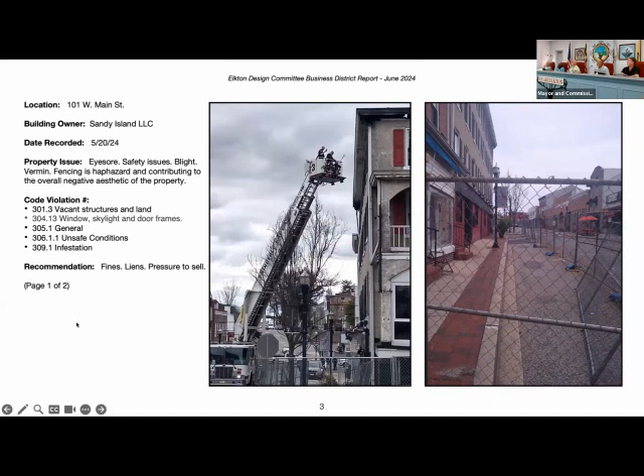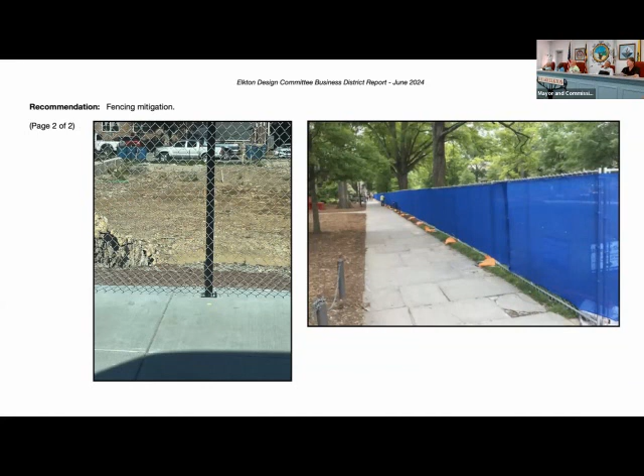On page 2, we have some pictures that, in an effort to mitigate the blight, we're suggesting ways to improve the appearance of the property. These images showcase ways to decrease the negative impact on the town's business district. The first image was taken in Oxford around the area where their devastating fire took place and has been cleaned up. The second image was found on the internet with a cloth over it, which helps give a more pleasing aesthetic to the area.

104 West Main Street - can I interrupt you real quick? Hey Dan, real quickly, could you get some geotech material and wrap around that fence? Sure, thank you.

The town currently pays $2,000 for that fence, we've paid 4,000 some so far. That geotech material is where you can't see in on it, it's actually pretty inexpensive and pretty durable, and we could probably do 2 wraps around the fencing if it's feasible. It's really not a lot of money and it would block that. Doesn't come in the beautiful blue though. That is a really pretty blue.

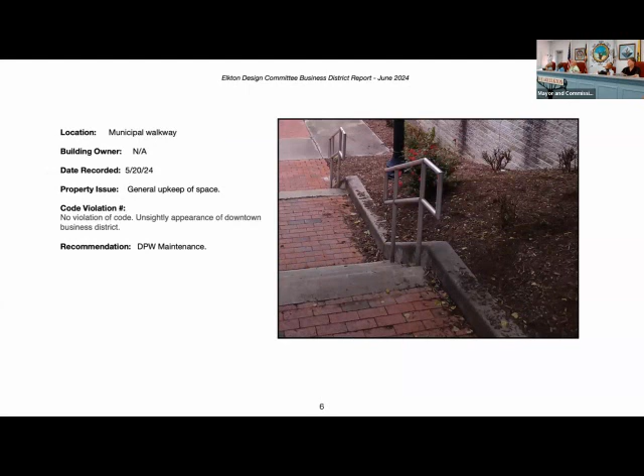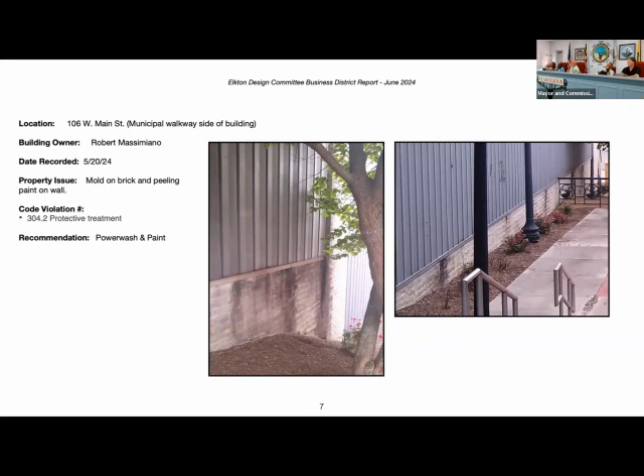106 West Main Street, we've got mold on the walls and the paint is peeling. 112 West Main Street, we've got mold on the brick also, and peeling paint.

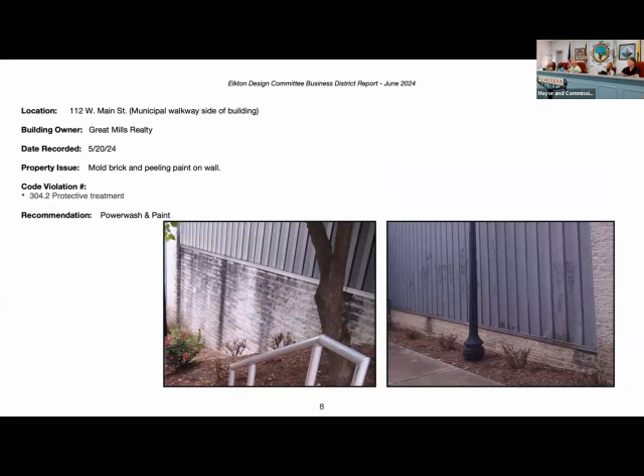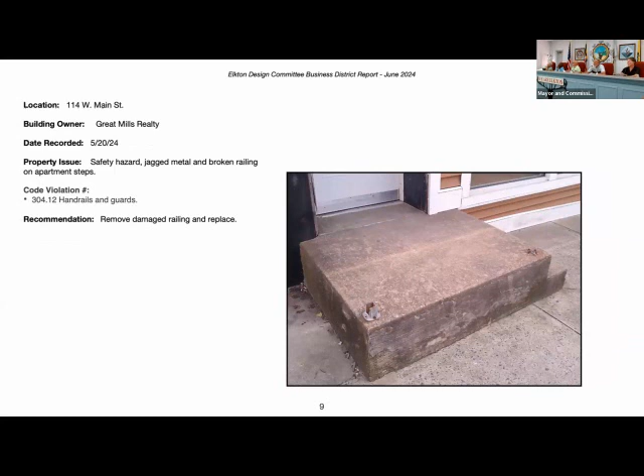There's a safety hazard at 114 West Main with what looks like a railing that got left down, and it's jagged metal sticking out. So that needs to be handled.

120 West Main Street, the empty metal awnings are an eyesore, and there's dead birds in the windows. We were told during Cinco de Mayo that somebody said the birds were slapping against the windows as they were walking up the street, and that was very upsetting to that visitor to our town.

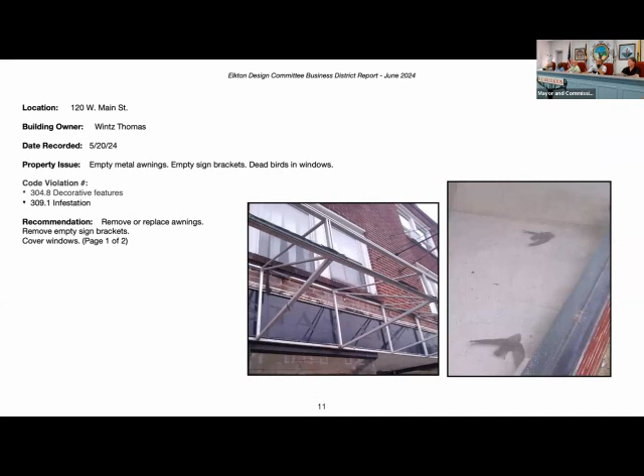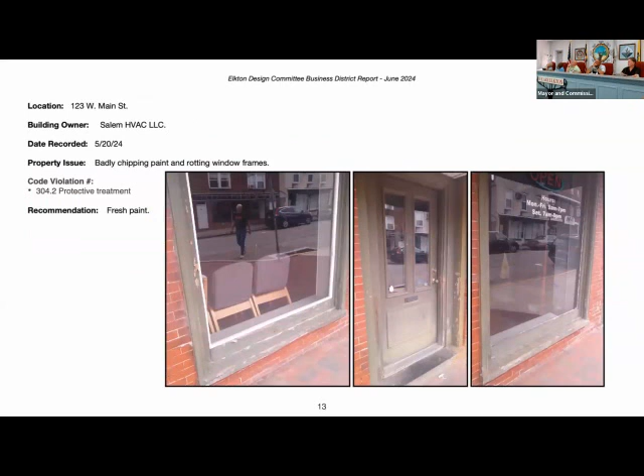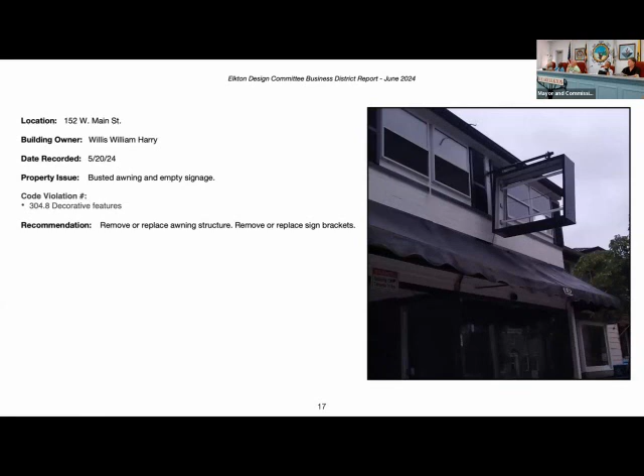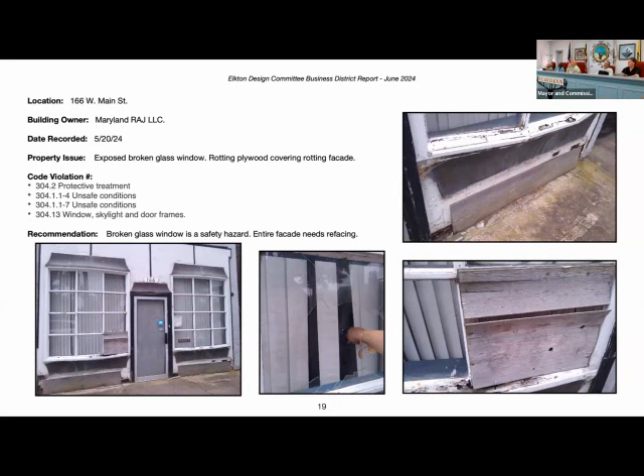166 West Main Street, this one really surprised us - a broken window, you can see one of our committee members putting her arm through the window so you can see the glass is broken out. The repairs they tried to do, that wood is rotting away. So this is really a blight, and it's one of the first buildings you see when you come onto Main Street.

Up at the corner of Bridge and Main Street, we've got some trees that are dead. And this is, again, one of the first things people see when they turn onto Main Street.

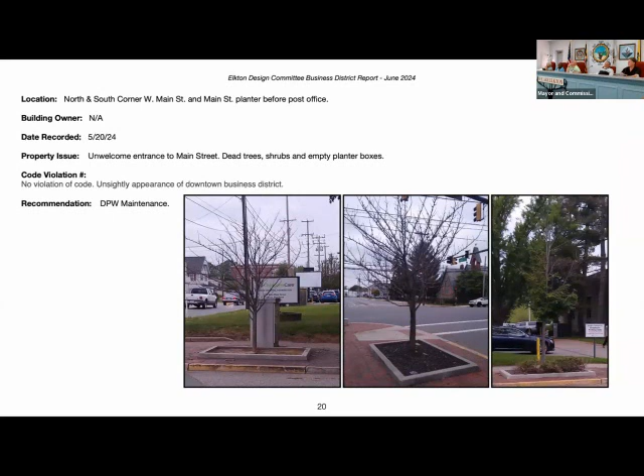Now we go to East Main. Our first foray was West Main, and this week we went to East Main Street. This is a crumbling window frame and damaged outdoor seating.

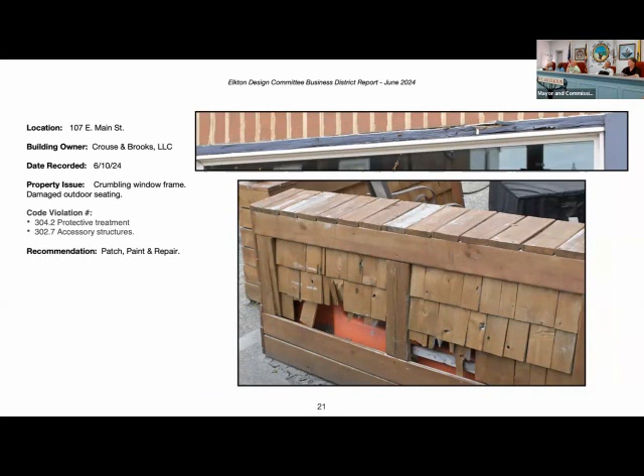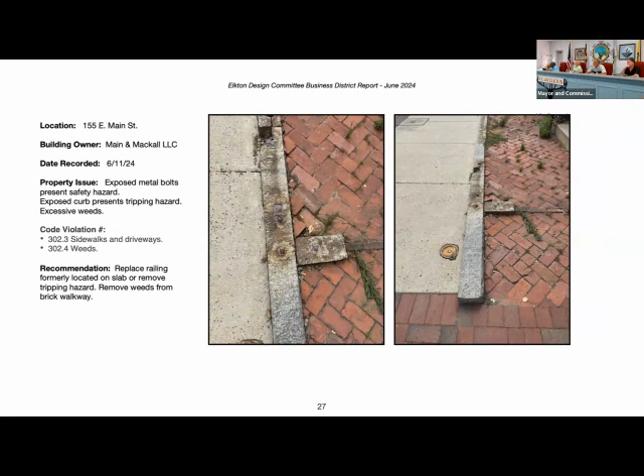This is 155 East Main, and I guess they had a railing here that they took out. They've got bolts sticking out of the ground, which is a safety hazard. The business next door has noted that people are tripping over this exposed granite edging that's now sticking up out of the ground because it doesn't have a railing. So that is a safety hazard.

110 North Street. This happens to be the Elkton Alliance building, but the doors in the back are rotting away and the windows are in very bad shape. I noted in the codes that all the windows on a building are supposed to be openable, and none of the windows are able to open at the Elkton Alliance building.

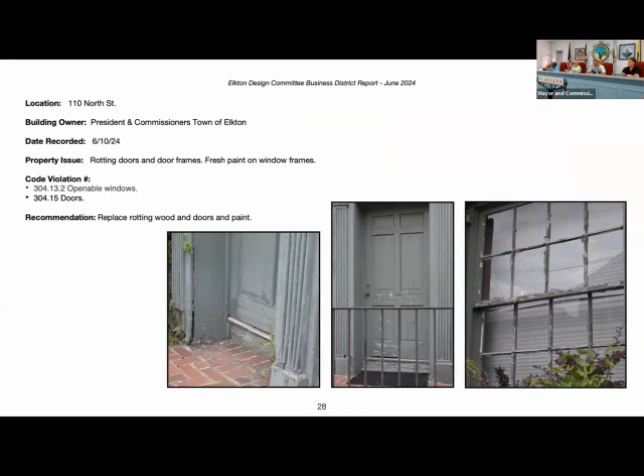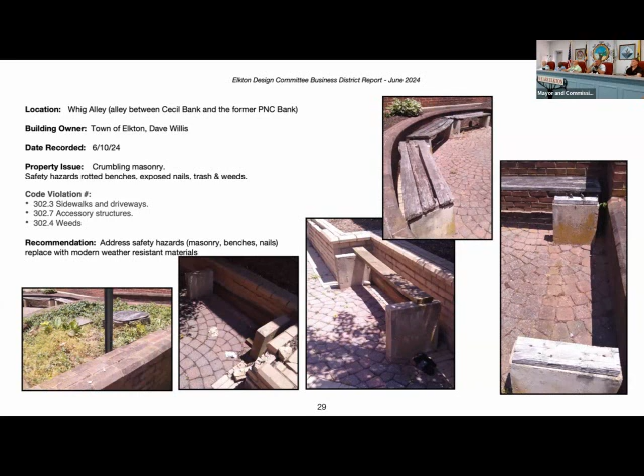So our next steps, as members of the Elkton Alliance Inc. Design Committee, we would like to collaborate with Town of Elkton team members to prioritize items listed in this report. And we wonder what your input is on that.

Jean Minner, you have a question back there?

Each year, the Elkton Alliance applies for the facade grant funds to help folks with their facade. Could you send direct mailings out to those folks regarding that? I think Alicia was looking for people to walk around town to do that. We've done that, yeah. We walk around town to give the information out to all the business and building owners, and we have them coming back to us now.

We have the applications due to us by Friday for the upcoming facade grant. But do you also have people who don't respond at all? Yeah. So it's owners like that that I think we need to have a plan B for, on enforcement.

Well, it's enforcement with all, not just those. Well, true, but if you have an owner who says, look, I know this has to be done, and I want to apply for the grant, this is my game plan, that's certainly a win. Could you get someone to give an estimate on all those areas of blight and then use the facade money as a collective downtown grant if you got permission from the property owners to do the work? Well, I will say that we typically get $50,000 for the facade grant money. That's not going to go very far. And also it's a 50-50, the owner has to put up 50% of the cost of the improvements.

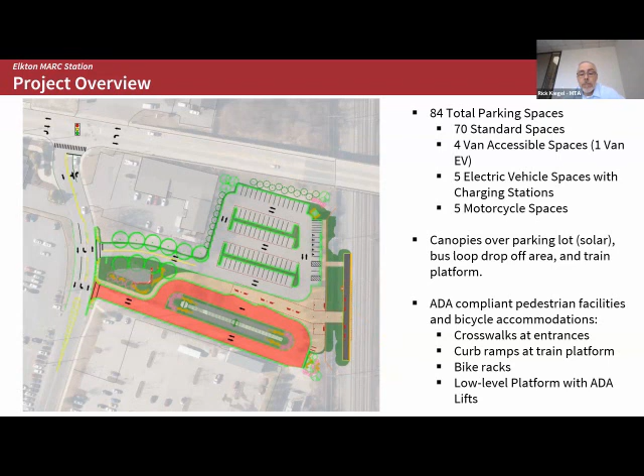As I mentioned, there's a dedicated bus loop. We like to keep that separate because of interference with pedestrians. That is a counterclockwise loop and should work out well for us. There are ticket vending machines on either side of the central aisle, so fare collection will all be done prior to boarding. There's variable message signage at the bus loop and on the platform. Cecil Transit will have the option to include their next bus technology information on that message board, and the same applies for the MARC platform, with variable message signage telling you when the next train is arriving or leaving.

At this point, MTA prefers to have the platforms gated so you can control access to the platform, and therefore the tracks, during off hours when there's no transit or train operations anticipated. So there's a secure gate at the secondary access point and one at the main entrance. Those won't be electronic at all—we anticipate they'll be spring-loaded, remaining closed, and people will just swing the gates open if they need to get through. Generally, the idea is to give people the impression they shouldn't be on the platform unless they need to be there for loading or boarding of the trains.

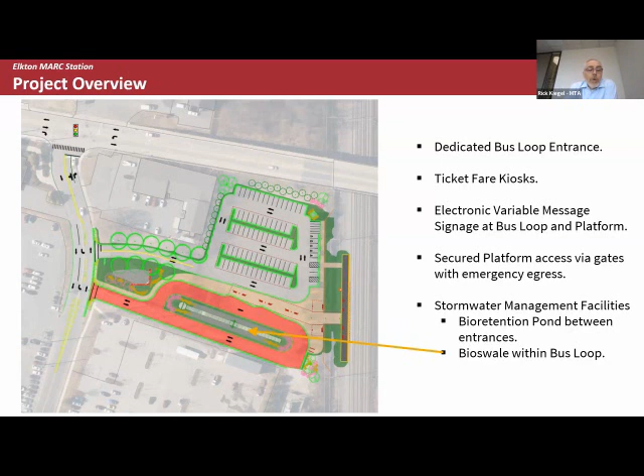Lastly, there are 2 stormwater management facilities. The first is planned between the bus loop and the general traffic entrance, a bioretention pond. The second is a small bioswale within the bus loops. Generally speaking, the site drains from the North Bridge on the upper right of our screen toward the hospital in the lower left.

Now I've got a number of renderings to show you. This is really what you can use to visualize what we're anticipating for the site.

The first one is the entrance from the parking lot itself off of Railroad Avenue. You can see the main entrance here for general traffic as well as the bus loop on the right there.

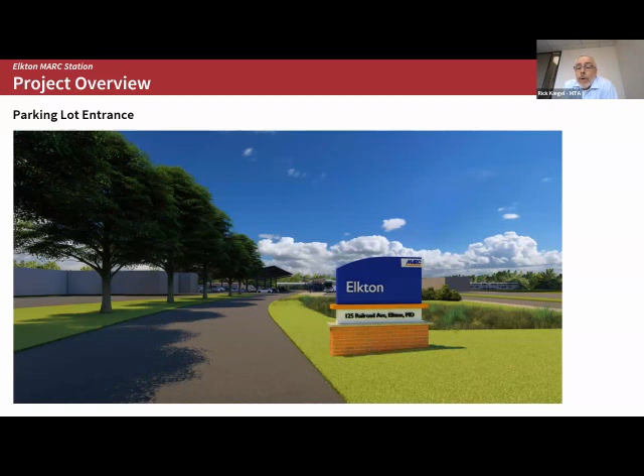Moving up toward the platform itself, the buses waiting there, the transit buses, and its boarding area covered with a canopy. On the left is the solar panel coverage over the parking, and as you can see, it's a fully covered access from the bus loading area to the platform itself.

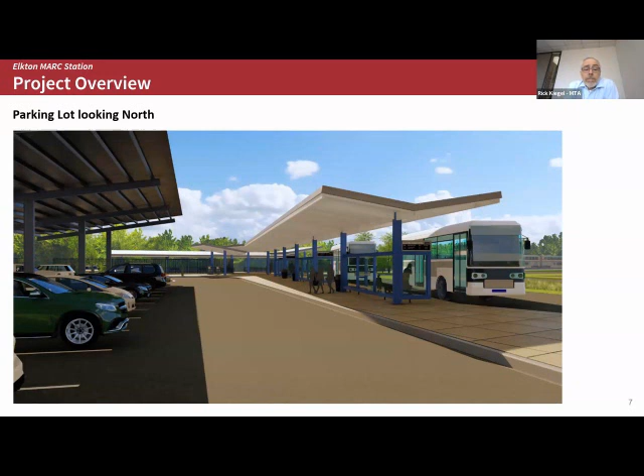Looking east now, north on the tracks, or in the east direction by compass, there are two basically wing canopies that serve to cover the ticket vending machine areas. The one on the far side essentially could be extended at some future point to provide access to the new full level station when it gets built.

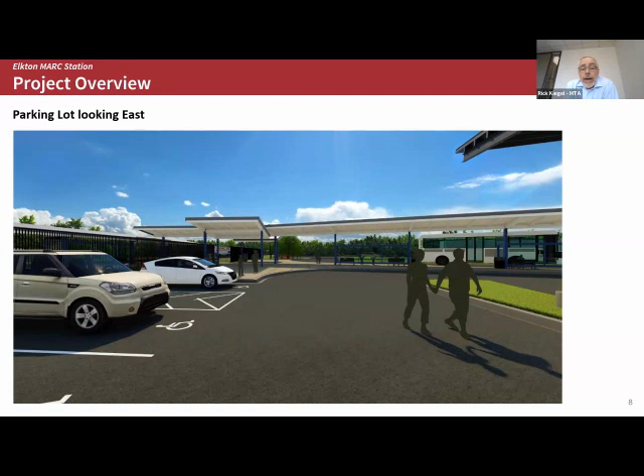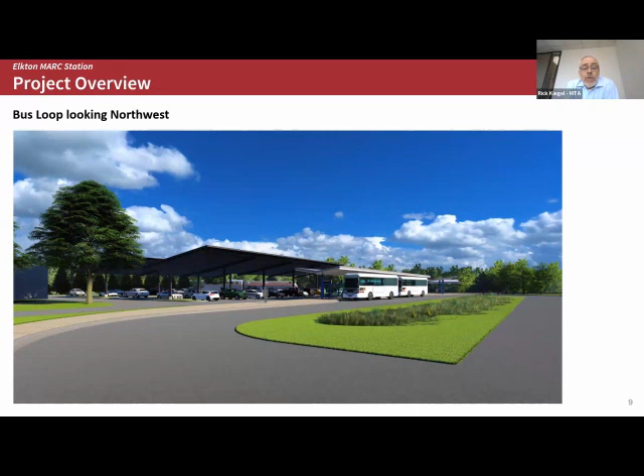Now we're looking at the bus loop here, and as you can see again, the solar canopies over the parking as well as the canopies over the bus loading area.

And again, now looking from the east toward the west, you can see all the canopies as well as the bike rack.

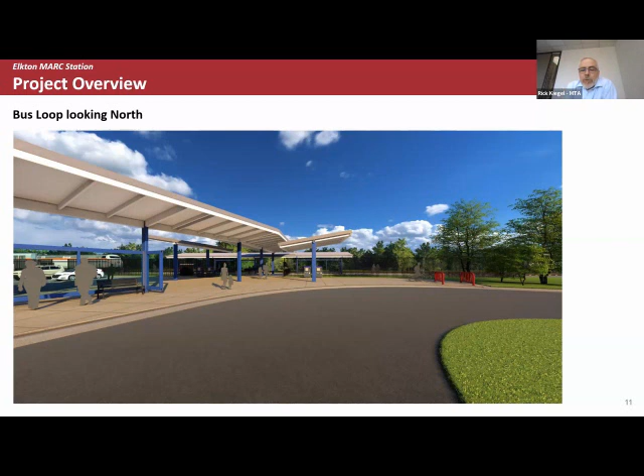Oh, I'm sorry, one more picture here. This is basically standing where the charter buses would drop people off and then provide that walk over to the platform itself.

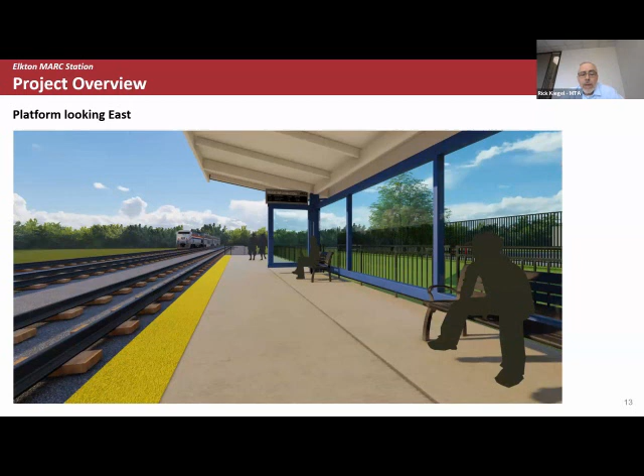We're on the platform here looking east, and then the next one is looking west. As you can see, there's canopy coverage, bus information panel, display sign, as well as benches for those who wait for the passengers. This platform would serve both northbound boarding as well as southbound boarding for all passengers.

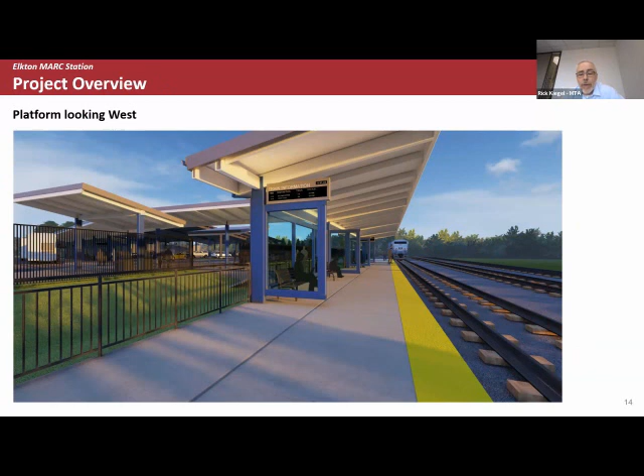And with that, I'll turn it back over to Sipte for next steps. Thank you. Thanks a lot for providing that overview, Rick.

So in terms of next steps, MTA had a legislative mandate to complete 30% design, and that's what we presented on. We are right now through the MARC growth and transformation plan, which is essentially looking at the long-term vision for MARC service on all three lines, including the MARC Penn line. We are looking at the service extension to Delaware, which would also include providing service at Elkton. The plan would really determine the investment program and the funding required to provide that expansion on the MARC Penn line, including providing service at the future Elkton station.

As part of that Closing the Gap initiative, we continue to coordinate with Amtrak on the pilot service to Delaware. That would include two morning and two evening trains, as directed in a similar bill mandating that pilot service. So that's where we are. I think with the growth and transformation plan outlining some of those service expansion programs, we would determine what the future service will look like at Elkton. We're happy to take any questions at this point.

Thank you, Sipte. Is there any questions from anyone from the board?

Who owns or what happens to that current little building in the train? It's owned by Union Hospital, that property. You know, she's talking about the existing Amtrak building. Oh no, it's owned by Amtrak, the existing train station on Bow Street. Oh, that's Amtrak, yeah, it's owned by Amtrak. No, I don't think they gave permission. That's why it had to go a different direction.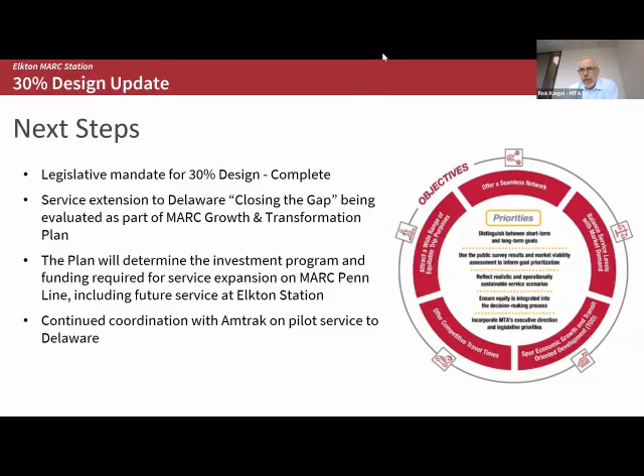Well, and as noted, with the NEPA process, we can't direct the town, nor can we advance on that property acquisition until the NEPA is completed, because it predetermines a station location, and the NEPA process is intended to evaluate a variety of options. Okay, I just thought that this was the preferred option.

Thank you. Anyone else have any questions or comments? Guys, thank you so much for sharing this with us, and we can't wait until we get to 100%. Thank you.

All right, next up we have discussion on well number 3. Come on down, KCI.

Okay, consulting 101, that'll be the reason why the mayor misses his flight. That's right. So we'll move pretty swiftly here, but very informal.

Always feel free to chime in and ask questions along the way. You don't need to wait until our quick presentation to wrap up. We did put together a few slides. We want to tell the overall general big picture. But the goal of the presentation is for us to spawn good follow-up discussions, Q&A, and take the discussion in whatever direction the board wants to take it.

Another point I want to mention up front is there's several different ways you can parse these options in terms of how you look at them. I choose to look at them as: you could realize more water from your existing wells, basically get more out of what you already have. You can drill new wells, and you can also purchase more water from Artesian. It can be a combination of all three.

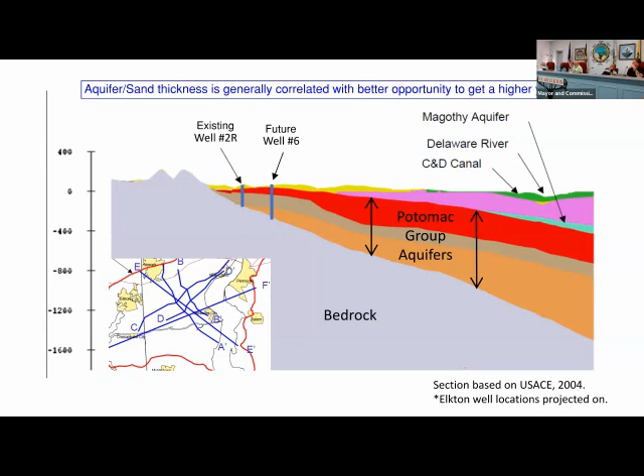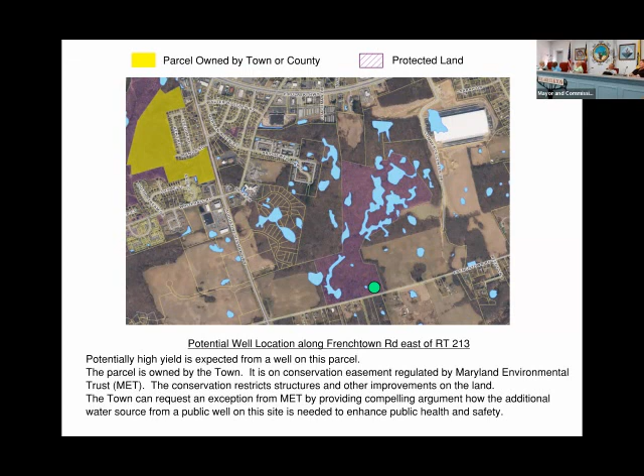And the town, there's a park south of that, and the town owns a large piece of land here. This is in the area that, on that delineated map, had the potential to provide a well yield of up to 100,000 gallons per day.

It's not a large amount, but it can be a supplement supply to the water treatment plant, especially during a rainstorm event that could cause a higher turbidity issue, or during the drought season, when there's a surface water withdrawal restriction posted by the state.

Just to give you a feel for the scale, you mentioned earlier that we have a 0.2 delta, meaning we're 0.2 million gallons behind in terms of how much water you need in the future versus how much you can currently withdraw. So 0.2 MGD is twice of 100,000. This well, if we put it there, even though it's not ideal in terms of total capacity compared to down in the southeast, it will get you halfway to where you need to be.

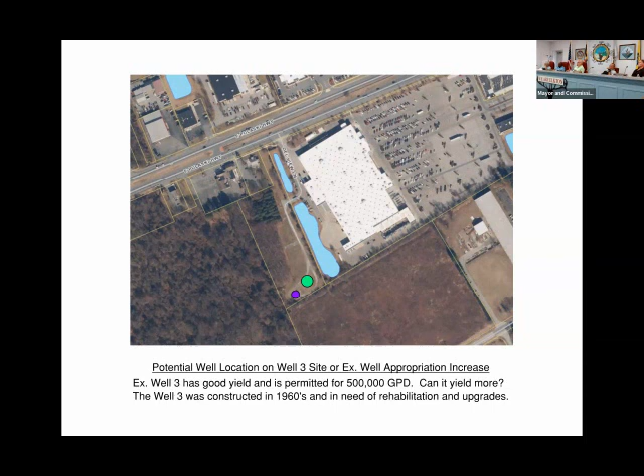The option could be, if the test well shows that there's more capacity for water withdrawal from the site, then either we can apply to MDE for an appropriation amount increase, or it could be another option to install a new well on the same site, if the existing condition is such that it's better to be replaced by a new one.

Right, next slide. Here is the procedure for sending the application to MDE.

In the handout, the second page is a two-sided page, the application form for the appropriation increase, either for a new well or existing well, if the amount increased exceeds 10,000 gallons per day.

The same form can be used for both purposes, and the application can start with submitting the form, the field form, with a background memo briefly summarizing the background and the water system description and need for the additional water supply to the town system, and showing the proposed well location.

And they will first perform a preliminary analysis review, and usually the turnaround time is 30 days. They will return back with a package with the list of requested information for further evaluation.

After passing the preliminary review, then they will require a hydrological evaluation to be conducted. That typically involves a 24-hour well test, just to show the limit of the supply capacity.

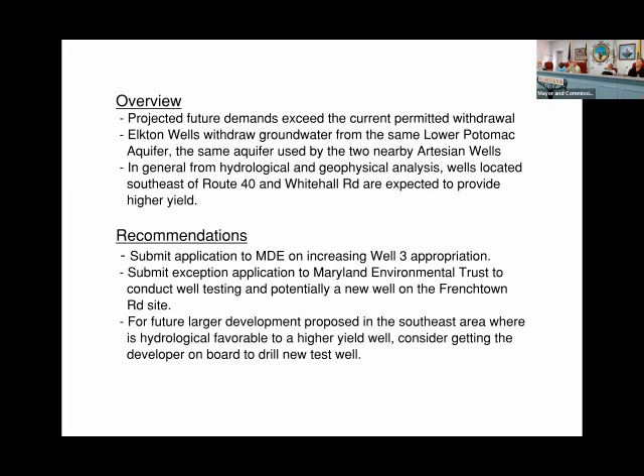That's good news. Mark, you had a comment? Yeah, I'd sent an email out about different locations. I saw from your info that some of them wouldn't work, but I like the idea of trying to get more water to the town ourselves instead of relying on one source. Also a quick question — regarding the PFAS filtration process, on the other side of that, what we're involved in, would this affect any of that?

Only in that if we go down the path of having a project at well 3 that achieves both goals of removing the PFAS and increasing the yield. In terms of how the funding works, the different buckets of money contributing to the project, we'd want to make sure the bid items clearly separate the PFAS treatment aspects from the extra yield, just so it's clear to everyone where that PFAS funding comes from.

Do you need a permit to do test wells over in the red area? Yes, and so far they've been very straightforward and not difficult. Yeah, it's more about having access to the land, but you already own it. Ryan, if the potential test well were heading a little bit west of our property onto that developer's property in the blue, would that be okay to test there? Yes. Okay, yeah, this is a great visual because you can see that anything southeast of this line, based on how the aquifer is structured, is all good opportunity.

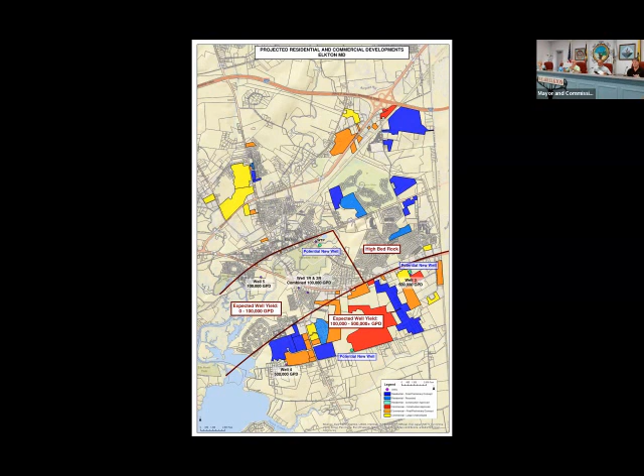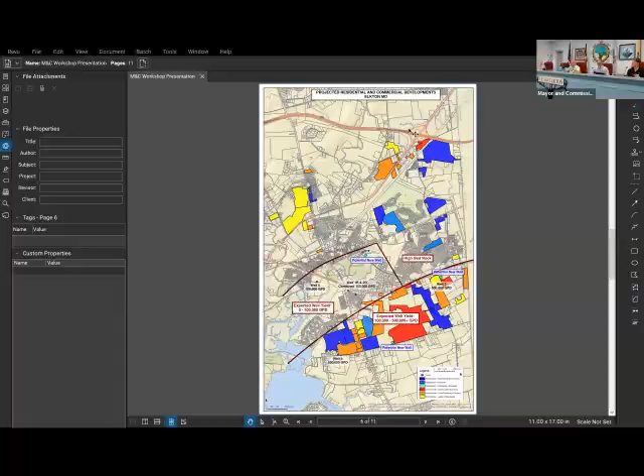There's one other thing I wanted to mention real quick before Gene leaves. Gene, Minner and I met with some folks from a SAS flood prediction solution — was it yesterday? It was an interesting meeting. They're going to create a model for us, taking all the data from previous floods we've had in Elkton, and they'll be able to create little areas based on it, kind of like Doppler radar, as they tried to explain it to me. I know Lewis uses a point on the Big Elk Creek that he watches when it gets high.

Yeah, the USGS site. They were saying there could be ways we could monitor to let our residents know that Delaware Avenue is going to shut down in 15 minutes — a warning system. It's kind of unique, what they were bringing to the table. Am I missing something? It's an early warning system, pretty unique, and the guy there — of course we're trying to get it grant funded — it'd be kind of unique if we could.

Anyone have anything to say? Anyone in the audience have anything to say? Anyone on the Zoom meeting have anything to say? Goodbye. Meeting adjourned.